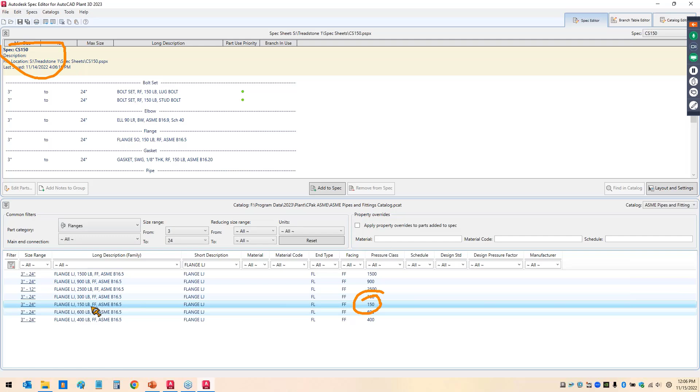Just again, that was to make the spec a little bit easier to look at. And I'll set the short description here to a flange lap joint. So there's not that many here out of the box. I'm going to take this 150 pressure class because that is the pressure class of this spec, and I'm going to add it to the spec. So now I've got the lap joint and the slip-on flange in my spec.

I'm going to go ahead and set the part use priority of the 8 inch one to where the lap joint is the priority. That's the only one I'm going to worry about. It's marked as resolved, so we'll hit OK, and we're done there.

Now, when you're doing a lap joint, you've got the stub end. If you're here, I'm assuming you already know how these work, so we'll come over here. The stub end itself is a fastener. It's still going to be 3 inch to 24 inch. But for the short description, I'm going to use a stub end for lap flange.

Right here, this one right here covers everything from 3 to 24. So that's basically a standard one, I guess. That's right there, the long pattern. I'm going to add that to the spec, and that's going to be the one I use.

So again, all out of the box. There's my stub end, which is a different type of fastener. You also have your bolt set and your gasket. I'm going to just be using the out-of-the-box bolt set and gasket that was there out of the box.

You'll see the issue later, and I'm not even going to bother changing those to a flat face, because that's the whole issue. If you notice here, the stub end is flat face, the slip-on is raised face. I don't want to have to sit here and put flat face gaskets and flat face bolt sets in there. I don't think it's necessary because, as you know, when you have the flange or the stub end, the stub actually changes that flange to actually use a raised face gasket.

Now, because normally if I wouldn't have changed that priority, I could literally just toggle the spec. But since I changed the priority, I'm going to toggle the project so that it gets that. I'm going to just go to the sample project and back again to Treadstone 1, and we'll reopen this drawing. And by toggling the project, that reset the priority for that flange.

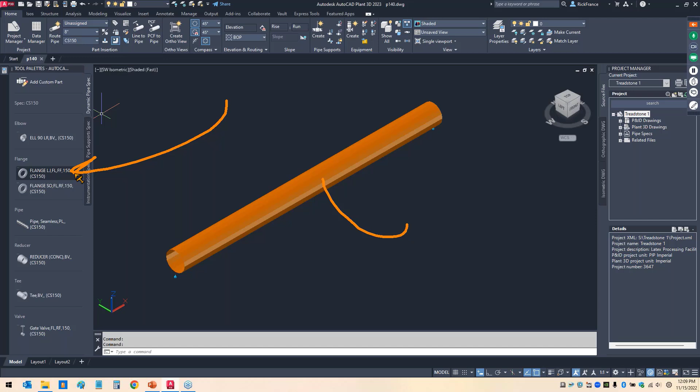So now you can see I've got the lap joint flange. When I put in an 8 inch valve here, I'm wanting it to use the default of the lap joint flange. But as you see, when I place it, it continues to use a slip-on flange. That's because this valve is raised face. And so when it's looking at that valve and putting it in, it says, well, I need a raised face flange. So it automatically puts the slip-on flange, even though I told it that one was the priority.

Furthermore, if I come over here and change this from the slip-on to the lap joint, I get this error message. Now, this error message is telling me that in those pipe connection settings, for some reason, that's hard for me to say today, it's finding a mismatch in the properties.

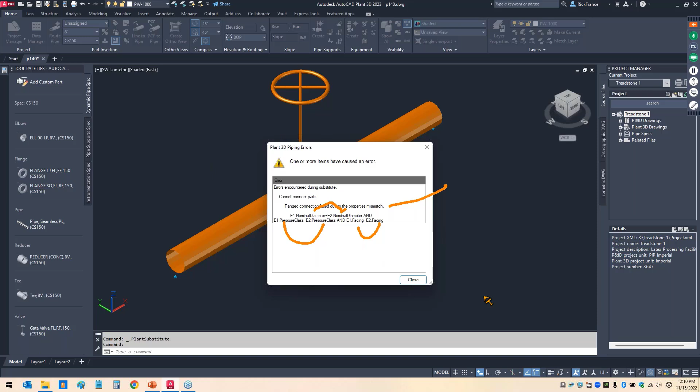It could be the nominal diameter. It could be the pressure class. It could be the facing. Well, we know it's not nominal diameter because I have an 8 inch flange and an 8 inch valve. We know it's not the pressure class because I put it in a 150 pound pressure class.

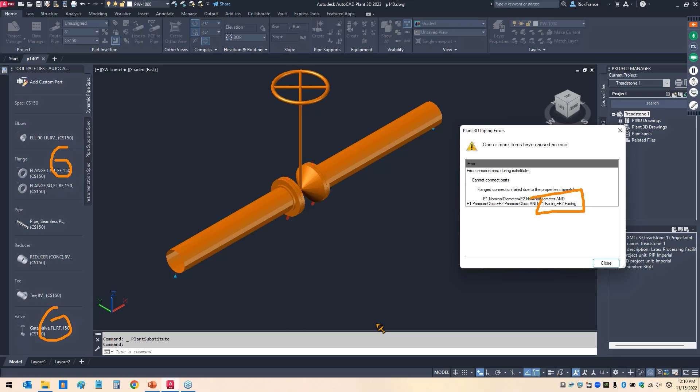That only leaves the facing to deal with, which is the issue because it's a flat face and this is a raised face. So therein lies the problem. It caused a problem with the auto flanging, causing it to put the slip-on instead. It also caused a problem with the valve itself, because it's saying, hey, I can't connect a flat face flange up to a raised face valve. That's against the rules. So I have the leak, and I have no gasket and bolt set.

I'm going to undo it back to the slip-on so I can show you two methods for fixing it. The first one being with the pipe's connection settings, which, as I said before, is the most common method people use. The second method is through a custom part in the catalog, or a custom change in the catalog, however you want to look at it. But we'll start with the pipe connection method.

I'm going to go to the project setup, and over here to Plant 3D, piping connection settings. So in the webcast on connections that really class up a joint, which was a year or two ago, I covered this particular dialog box in the project setup in detail for everything in here.

We're not going to have to cover it in as much detail, but everything we did here, I believe, was mentioned in that particular webcast. We just didn't cover it specifically for lap joint flanges, and therein lies the confusion of why people wanted more information about this particular one.

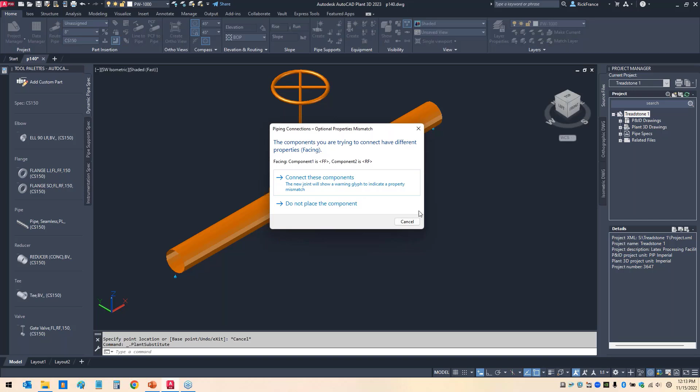It worked. There's no leak, there's gasket and bolt set. Everything's fine. The problem with this method is that you're going to get that dialog box of the mismatch every time. It also still won't work on the auto flange, but that's for later. I'm going to undo it back to the slip-ons. So personally, that method I've found to not be a good idea, because I don't want that dialog box constantly.

So to fix that was the second method I've seen, which is just go to facing and delete it. Go ahead and modify, hit OK. That actually worked. No dialog message, everything changed. It actually worked. Doesn't help me on the auto flanging. But it worked on this particular one here without the message.

The downside to that particular method, in my opinion, is that any flange will connect, no matter what the facing is. So it doesn't matter if it's an RTJ, doesn't matter if it's a raised face, a wafer, lap joint to a flat face, to anything. Any flange facing will connect at this point, which in my opinion is not a good thing. So I don't particularly like that method.

Although if all you're doing is connecting lap joints to raised face, it's easy, just go delete that out and you're done. So that's not a bad option if that's all you're ever going to be doing. If you also are using flat face flanges or RTJ flanges, not a good method in my opinion. So I'm going to come back in here.

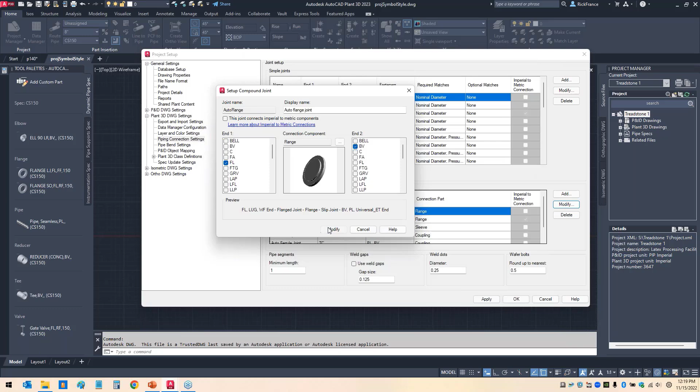Now I want to fix the compound joint issue to where when I place it, that's just another setting in here, still in the pipe connection settings. If I come down here to auto flange, hit modify, right here where the flange connection of the component is, simply turn off the facing. This is not much different than what we did before of deleting the facing, but you just turn that off, and that will allow, based on this setting up here, for the auto flange. So the flange will be protected here with that raised face, flat face thing we did, but here it's just not going to take that into consideration.

At that point, by turning that off, when we put a gate valve here, it puts in the lap joint because that was the priority. So it actually put in the lap joint with the stub end, and I'm good to go.

Again, that doesn't help me much because I really don't like deactivating the facing, since I want the facing to check and shake hands correctly myself. I could go into that default connector config XML and make some more and/or statements in there to get that to work without turning off the facing, but again, it's almost like a little bit of programming knowledge there. So personally, in my opinion, neither of those are good ideas. They are the most common though—you'll find them all over the internet, and I just don't think they're great ideas myself.

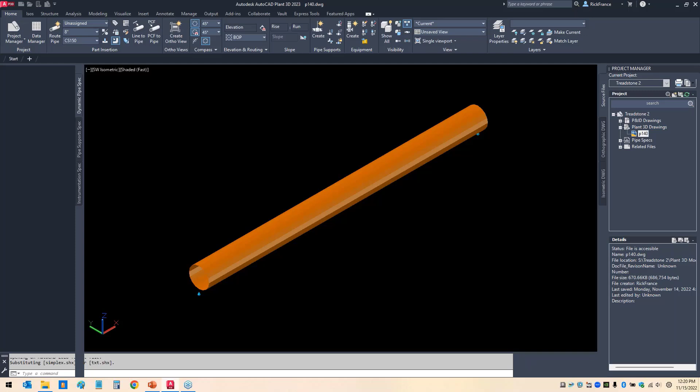But we'll go ahead and change. I'll close this out, and we're going to change projects over here to Treadstone 2, which I said was an identical project. And it is, same exact thing, same drawing. You notice I'm back down to not having lap joint flanges, exactly like we were at the beginning. So here's the method I personally prefer, and that's doing a custom lap joint flange and just making one minor change. For this, we're going to go back to the pipe spec.

And this time, instead of changing directly in here and adding the lap joint, I'm going to come over here to the catalog editor. And I'm in the valves catalog, so I'm going to change that to the pipe and fittings catalog.

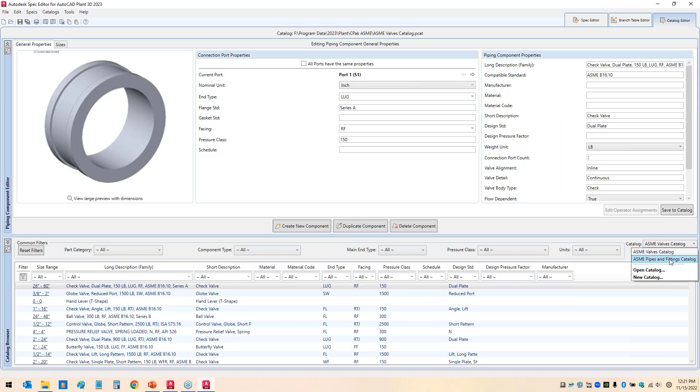And we'll come over here and we're going to look for flanges, lap joint right there. So there's that 150-pound one that I've used earlier. So I'm going to select that one.

If you've ever taken a class from me or know anything from other webinars, I am not a proponent of making changes in the out-of-the-box catalog, especially something like this, because I want this to be used over and over again without me having to worry about new versions, new catalogs, things like this. So my belief is I want this flange in my personal custom catalog.

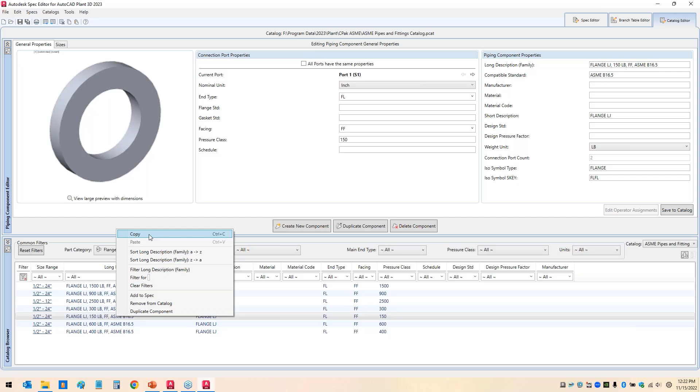So I'm simply going to select it, right click, and copy to my clipboard. Then I'll come over here and open my catalog. Just go find wherever I've got my catalog and say open. So now I'm looking at my custom catalog.

Some of these you may know from other webinars. Some of this is from training classes. Some of this, who knows.

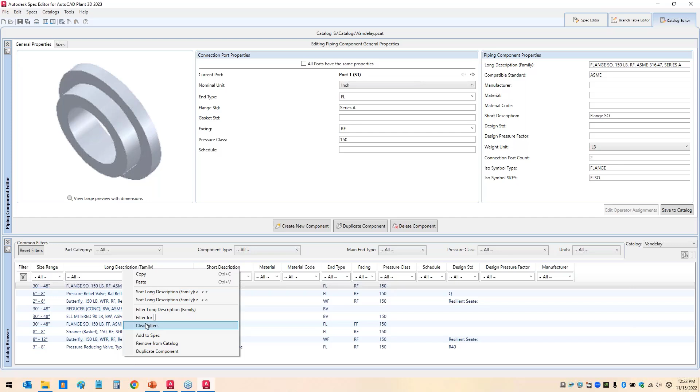But right now I'm going to right click and paste, and that pasted. Let's make this on part category flanges. So now there's that lap joint flange that I just copied from the out-of-the-box catalog, and literally pasted it in here, and now I have it in my custom catalog.

So here's the issue. The facing is flat face. While that is true for the lap joint flange itself, like we said earlier, once you put the stub end in there, it's really a raised face connection.

So here's all I do. I just literally... this is unchecked because that port is a completely different one, doesn't have a facing, so I don't want to change it. So I just want port 1.

I literally just change that to raised face. So now it will connect to another raised face flange. It knows to use a gasket and bolt set that's raised face. Everything is going to act like a raised face flange.

But my bill of material, I'm going to leave saying flat face. I don't want to change that. It really is a flat face flange. So I am going to let my bill of materials still remain saying flat face.

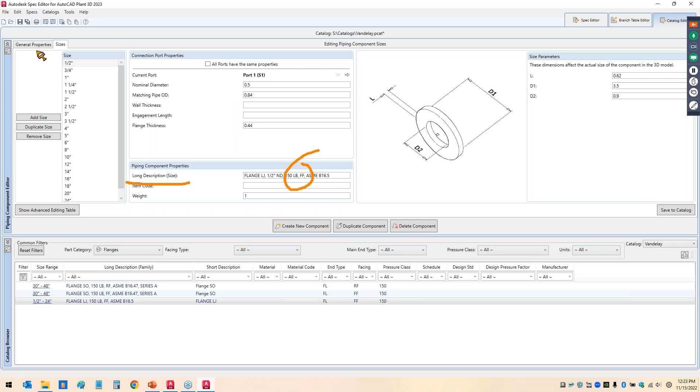I'm going to let my long description size still say flat face. So no matter which method I'm using for my bill of materials, they're all going to say flat face. The only difference is the facing right here is going to say raised face, and that serves no other purpose than connection. Outside of that, it's not showing up in a bill of material.

It's not showing up, it'll be in the data manager. Anyways, in this catalog, I copied and pasted. I changed the facing to raised face, but I'm not changing it in the description of the family or the size. I'm leaving that flat face because it is a flat face flange.

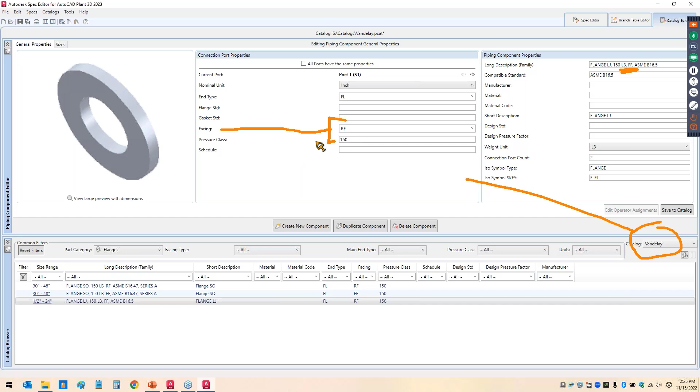I'm only changing this because this only has to do with connection. Nothing else. Has no effect on my bill of materials or anything else, just connection. So I save that, make that one minor change to raised face, and hit save to catalog.

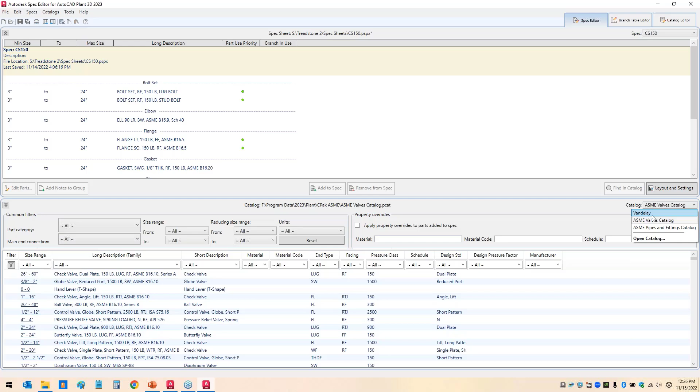And then over here in the spec editor, I just need to make sure I'm on the right catalog. Come over here, and I did change the right catalog to that catalog. And then I added this to my spec, same way I would anything else. I'm going to go ahead and set the priority of the 8-inch, so that part's done also, like we did in the other one.

The last thing I need is the stub, because I'm just going to use the out-of-the-box stub because I don't need to change it to anything else. That's a fitting, 3-inch to 24-inch.

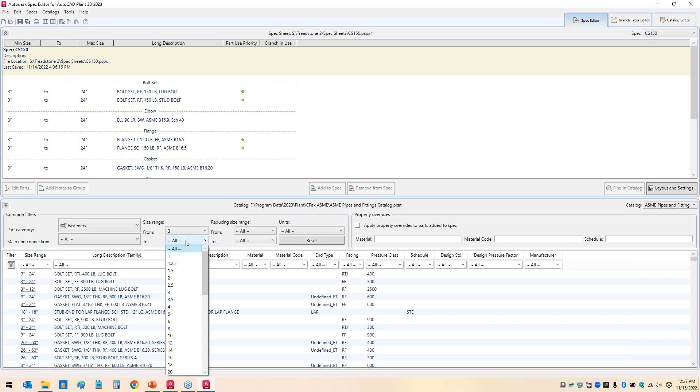Oops, I picked 2.5. 3-inch to 24-inch. And it's going to be stub end for lap joint, the exact same one I did earlier. I'm not making a single change to that. The only change was to the flange, and again, I did that in the connection part, not in the description part.

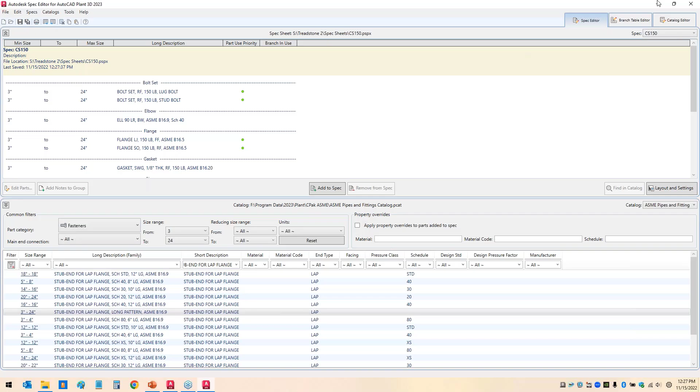I'll save this. We'll go ahead and close the spec editor. Just like before, I have to toggle projects since I changed the priority.

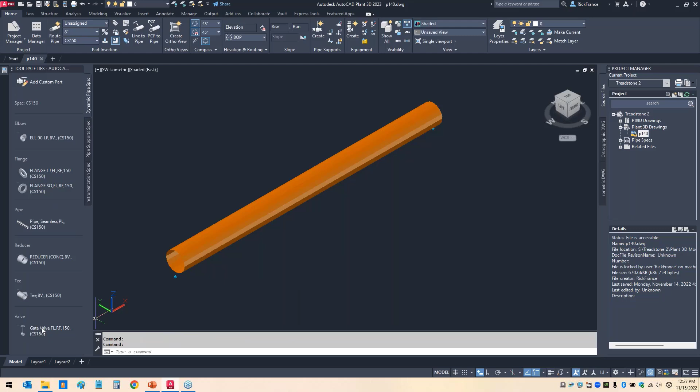So we'll go ahead and toggle back and forth in the two projects, open our drawing back up. This time, as soon as I place that gate valve, since it was an 8-inch, lap joints in there.

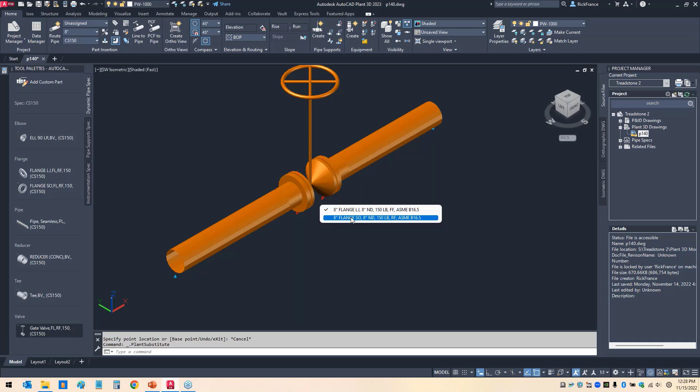Didn't have to do anything to the pipe connection settings. Don't have to worry about raised face and flat face not connecting correctly. It literally fixed this one to where it acts like a raised face flange, which in this situation it is, even though it literally is a flat face. And yet it kept the flat face information in the family and the description size. So everything worked. It was just this one setting right here that was causing the issue. You fix that, you're done.

I put it in my custom catalog because when I get the next version, it will have the lap joints in there set to flat face. So I'm always going to use the one in my custom catalog, which is just an identical copy of it, just set to a raised face. That's my personal opinion of how to use it, because it fixes it instantly without any other settings, and it's fixed in every project that I place it in. So I don't have to worry about any project settings. That just fixes it all the time.

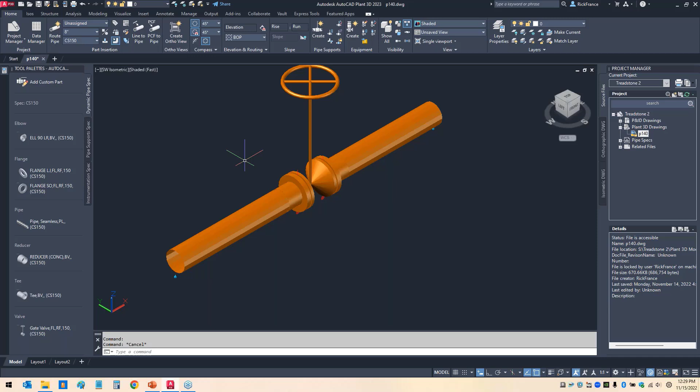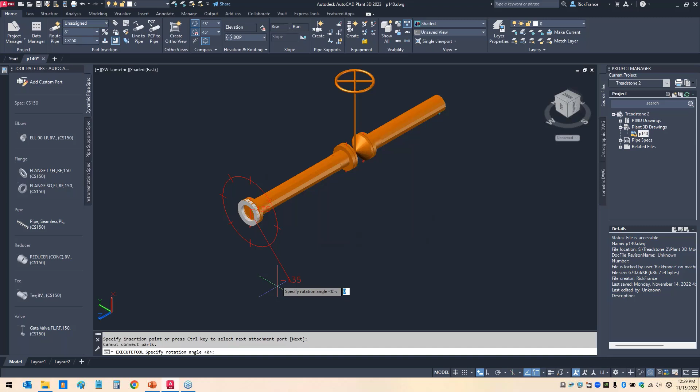Couple of things for side notes, just because I've been asked this by other people in the past. It doesn't matter, AutoCAD will not allow you to place a stub end to stub end. In other words, it won't let me connect stub end of a lap joint to a lap joint, or stub end to stub end. That's just an issue that's been there for years, and it's still not going to be working on that.

The closest you can get to that would be to go to the pipe connection settings, and you can set the minimum length for a pipe segment. The smallest you can go, I believe, is a 1/4 inch. Yeah, 0.25, so you'd have to set it for at least a 1/4 inch. And with that, you could stretch this piece of pipe down as small as possible, so you end up with a 1/4 inch piece of pipe in there. That's as close as you're going to get.

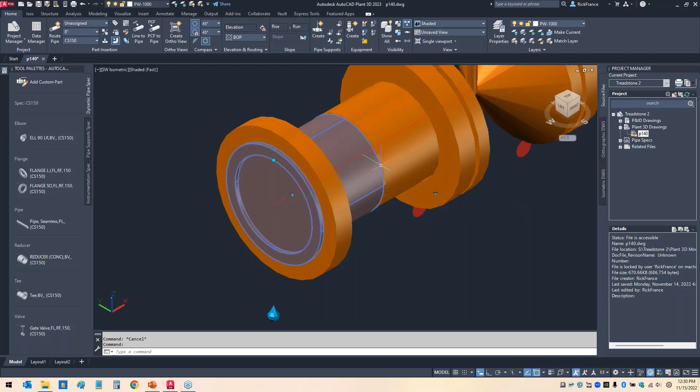I can't get that piece of pipe to select, it's so small. There we go. You'll end up with a 1/4 inch piece of pipe. That's as close as you're going to get to a stub end, because if you delete the pipe, the stubs go away. So that's still something you may want to put on the wish list and make comments on.

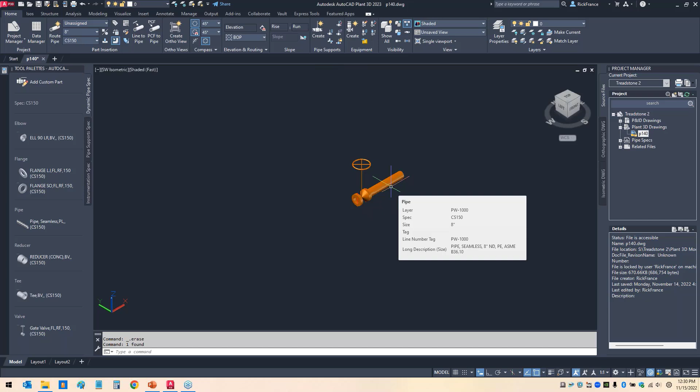And just like any other flange, it's not going to work with auto-flanging on fixed pipe, because that doesn't work on any type of flange in AutoCAD at this time. Something that I wish they would fix myself.

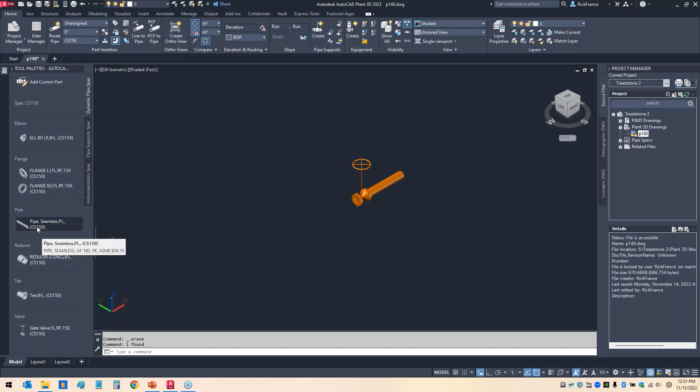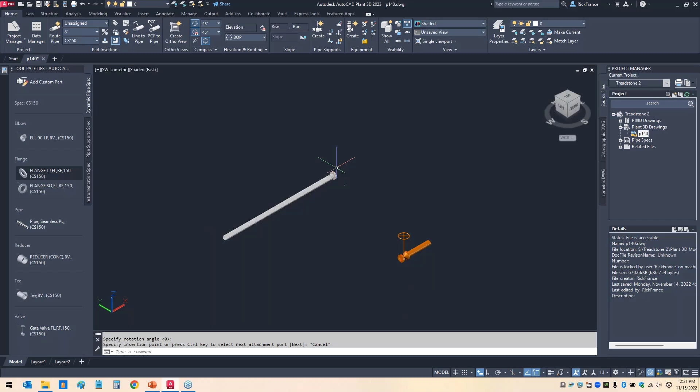But the closest you'll get there is to basically draw a piece of 20-foot pipe. Say it was 20-foot fixed length, you could draw a piece of 20-foot pipe, put a lap joint flange on it, draw another 20-foot piece of pipe, lap joint flange, and on and on. So you'd have to physically draw it. But that's the same way we do any piece of pipe that's going to have flanges like that, unless you use those pipes in the catalog that have flanges built onto them, but then your bill of materials won't show the flanges. So if you want the bill of materials to show the flange when you're doing 20-foot fixed pipe, you just have to draw it 20 foot at a time. Nothing I could do about that. That's still an issue, even with lap joint flanges, just like any other.